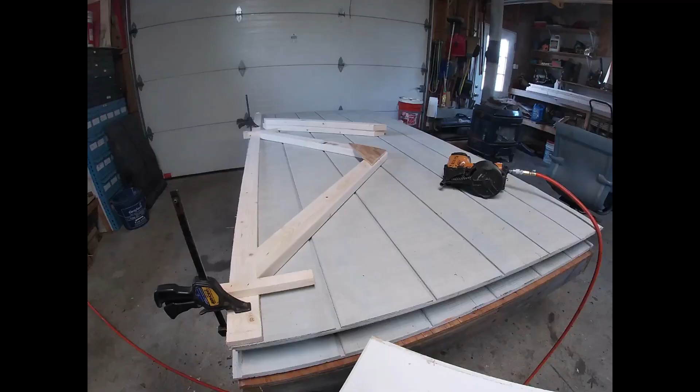I set up this little jig, if you will, just a piece of any kind of lumber. I clamped it here and here, and I measured 54 1/4. As you know, 27 1/8 to 27 1/8 is 54 1/4.

So I got that measured out to that dimension. I stapled a couple of these on, either screw them, whatever. That'll help you set up. You come down and place that flat on here, here, and then you can check out how everything looks. Pick up your gussets. They don't have to be perfect or anything.

Basically this dimension here, they can be wider or narrower to your liking. I'm going to shoot them with a... what I have is 1 3/4 inch nails in this gun.

One truss is done. Now what I did on this one is I made a little jig, nothing more than a 2x3. That's 54 1/4 inches from end to end. And I put the top of this 2x3 right at 6 feet.

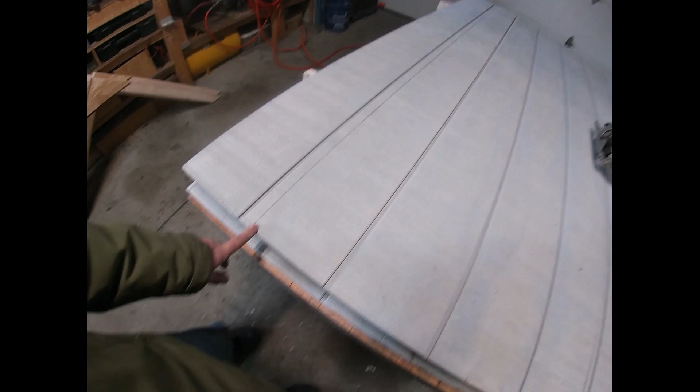I got the gable end peak marked out, and also the doors. I'm going to go with 30-inch doors. Kind of wide for this size shed, but I want whoever gets it, ends up with it, to be able to put a snow blower, and most walk-behind lawnmowers could go through this door.

The height, I'm going all the way up to 6 feet. Right below that, eventually when gable walls are in place, I'll have a top plate going across here to tie that in. So I'm going to go ahead and cut this, and then I can move it out of the way and build the rear gable end wall.

After I downloaded all my clips, I realized that I don't know if I made it very clear, so I'm going to clarify a couple things.

Pretend this sheet, because I had to go get a leftover cut piece of T111 to demonstrate this. Picture this sheet going on down, not cut here. And I don't know if you, in a previous video, saw how I had this little jig I screwed on temporarily just to put it in the position of where my sidewalls would end up and where my soffit would be positioned.

This black, if you can see it, represents the siding of the sidewalls coming up. So obviously this is going to come over and cover up the sidewall, because that sidewall siding expands the width of the shed by that amount on both sides.

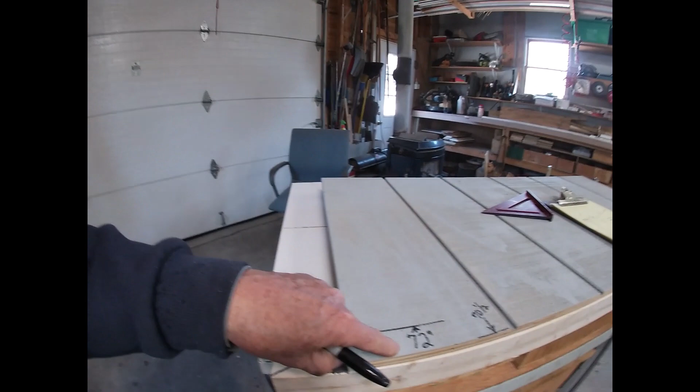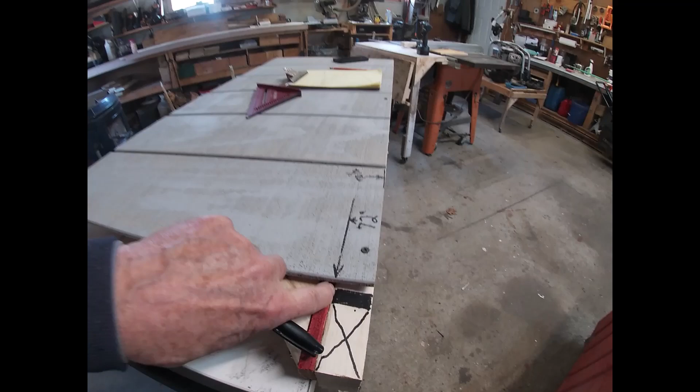I want to mention that this 72 is the height you want, if you're going to do this little jig method to simulate your soffit and whatnot, and your T111 thickness there. Not this plywood, but this little piece, right where the top of this 2x3 ends up, put that at 72 inches, because your sidewalls, the T111, is 72. Also, I don't know if I messed up, but the door height ends up being 70½, because later on you might want to put a top plate across here.

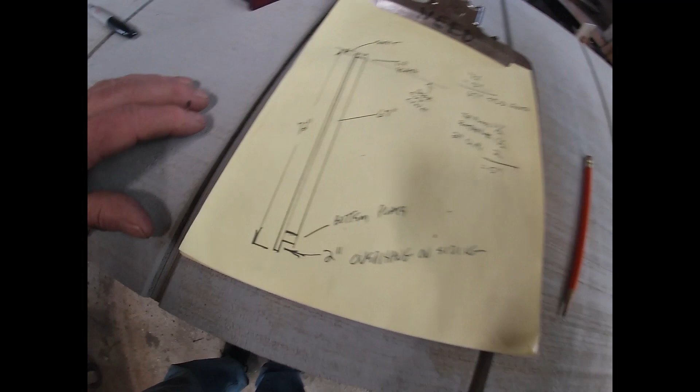Over here, I drew up this little diagram, I hope you can see this. This is your sidewall, looking on the end of it. So in my case, I had 72 inches of T111 I wanted to use.

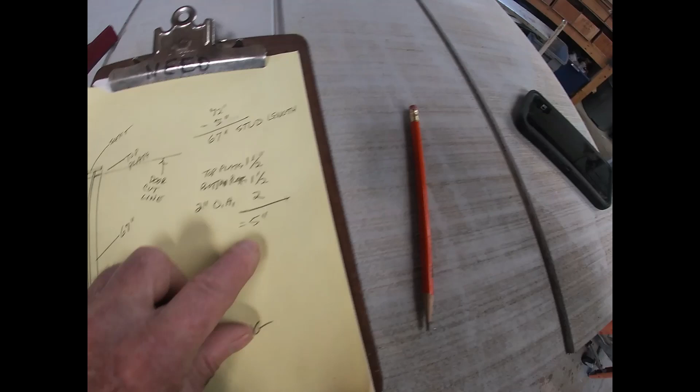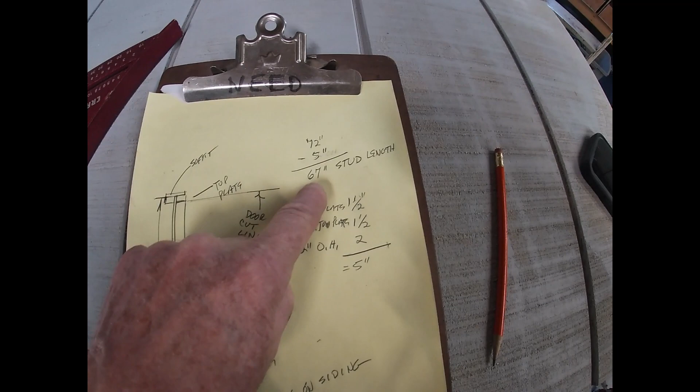With 2 inches of overhang, a bottom plate and a top plate, that adds up to 5 inches. Subtract 5 inches from 72, which is your T111 length, and that'll give you your stud length, 67 inches. So you could cut all your studs 67 inches, frame up your sidewalls, and when you put your T111 on, you'll have your 2-inch overhang.

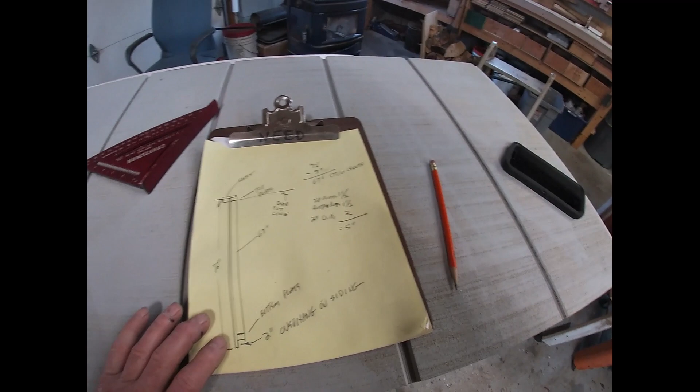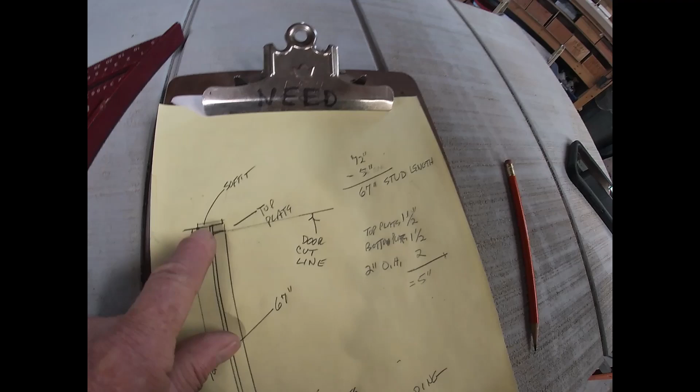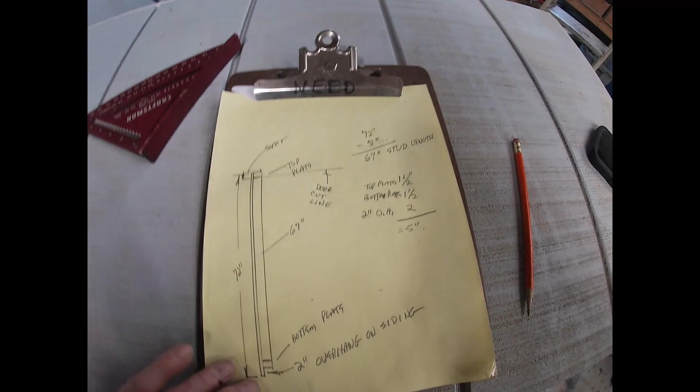I hope that's somewhat clear. Up here you can see how the soffit drops on, and you can see that 72 is right there underneath the plywood or OSB or whatever you put on your soffit. It's pretty much straightforward, common sense, but I'm just giving you this in case you decide you want your sidewalls higher, how you can quickly determine all that.

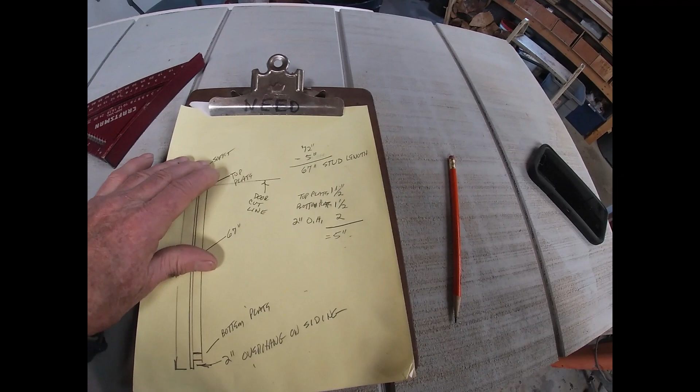A lot of times my sidewalls, I'll build them at a height that will allow me to make the pitch I want and not go above the 8-foot level of the T111. Now on my wider sheds, a lot of times I do go higher. I want to get a higher sidewall here, and to get a halfway decent pitch, I'm up above the 8-foot mark, but I just piece it in.

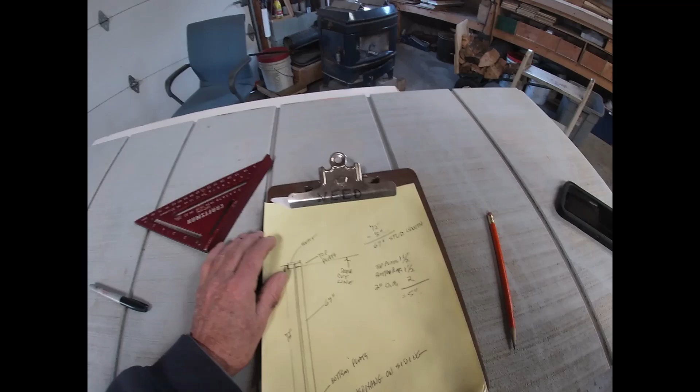I'll try to inject a photo of, I think, a 10 by 12 shed I did. I'll show you how it came out. Well, I got interrupted there, but...

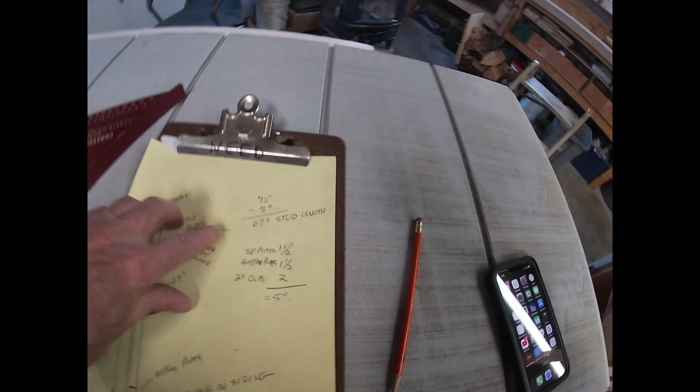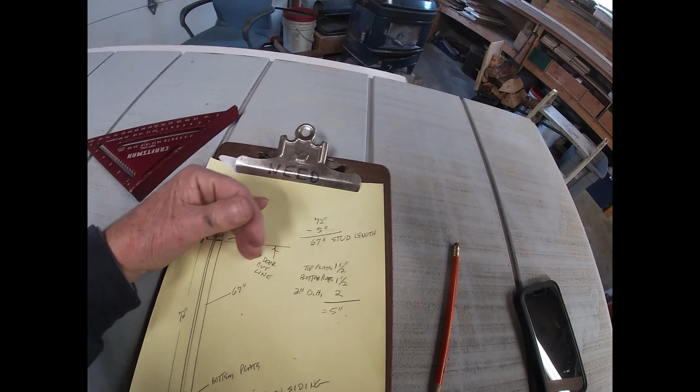As I was saying, on my wider sheds, I'll go higher on my walls. Depending on the pitch, many times I don't want it too flat, so to give it a halfway decent pitch, I'll come above the 8 foot of the T111, and then I'll piece in a piece at the top with Z flashing or drip cap, whichever you want to call it.

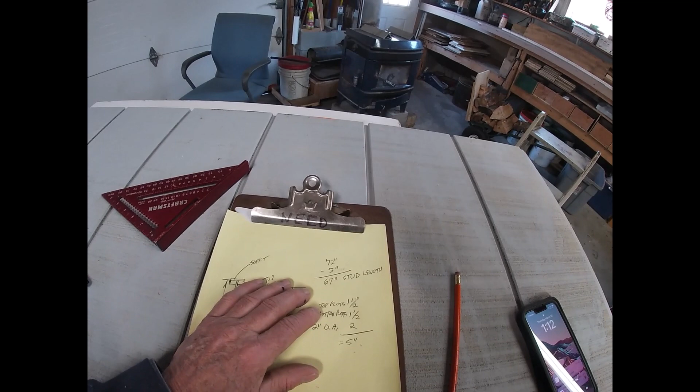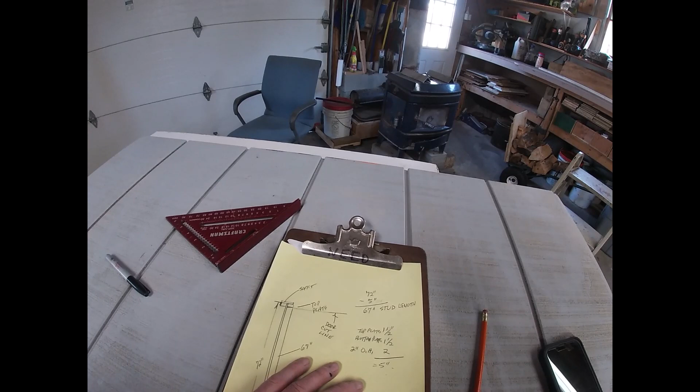I'm going to try to put in a photo of a 10 by 12 shed that I used the same process with for the soffits and everything, and also to determine my length and angles of the soffit, rafters, and the one difference is that on the bigger sheds I do the soffit pretty much all the same.

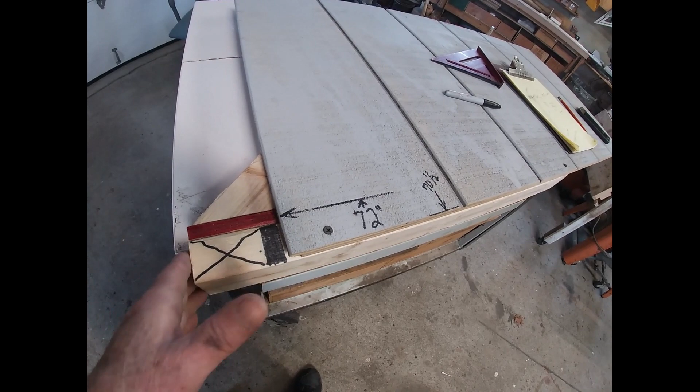Over here, but once my sheathing is on, I'll put a 1x4 piece of pine on here, and that gives it a wider profile for my fascia board coming down, just to look a little better. You wouldn't even have to do that, but you'll see on that shed it's got like a 1x4 pine fascia board. And if you do that, you don't have to change any of this, you just add that on. Your drip cap will cover it.

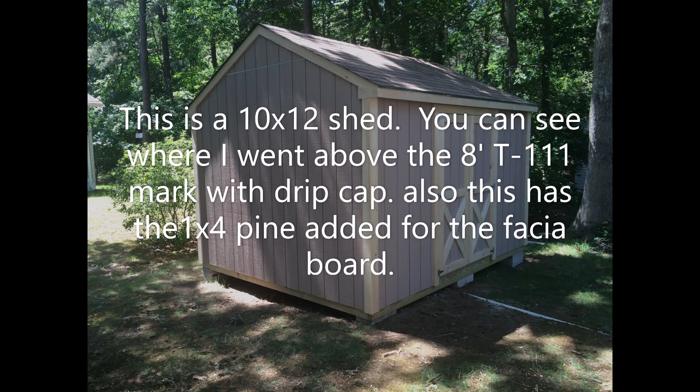I framed up both of the side walls, going 2 foot on center on the studs. These are the soffit assemblies, and I made up both of them. I used 1 3/4 inch nails, kind of zigzagging them down, to attach this OSB to it.

The reason I went with 1 3/4 inch is that 2 inch will just pop through, and you'll have the tips of the nails sticking down below the soffit when you get them on the shed.

I'm going to attach the T111, which I already cut to 6 foot panels. The framing itself measures from top to bottom 70 inches, so when I put the 6 foot siding on, I'll have a 2 inch overhang like I mentioned before.

I went ahead and pre-cut all the panels because I'm limited in space here, but you could put the panels on and cut off the extra 2 foot instead. If you notice here, I got a bunch of 2 foot pieces left over, the remainder of those four sheets.

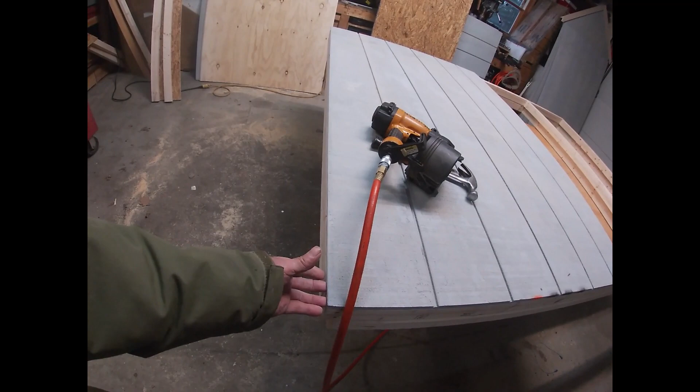So you always want to start out with this side having the groove. I'll call it the groove, I guess, and I'll call this the tongue, just for coming up with some kind of terminology - can't think of anything else at the moment. Now the next sheet will overlap this by half that amount.

Now I'm sliding my other sheet in. You can see that this side here is the side that overlaps, so you drop that right on there. Got your nice little overlap - square it up nice. So it's overlapped perfectly, catch a nail right here.

Don't worry about what's happening down there. Same thing, just push and pull, you get your nice flush. All right, that's really nice right there, about halfway. Then I'll check it down here - nice and flush, now I got a nice straight run.

I don't want to nail anything here because I want to be able to move this if I had to. See, that's pulled out - bring that in, nice and tight. I'll catch a nail right here, and now everything's locked in. I'll put one here if you want, and at that point you pretty much have everything squared up and ready to shoot it off.

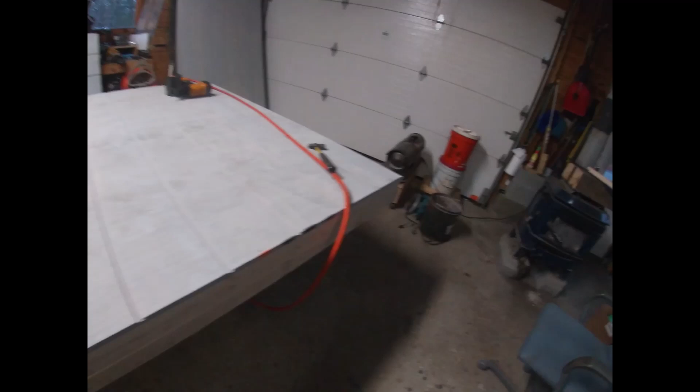But over here, because these sheets are wider than 48, you're going to have to trim off this part of the tongue. Right here, don't know if you can see it, but I got to trim that off - I'll just hit that with my Skilsaw.

And when I put a nail in here before I shoot it up, I'll maybe put one in the middle, but I'll check my stud to make sure it's straight, because if there's any bow you can take it out at this point, and then you're good to go. Second side will be the same way.

If you notice right here, I got my 2-inch overhang. That'll go down over the floor.

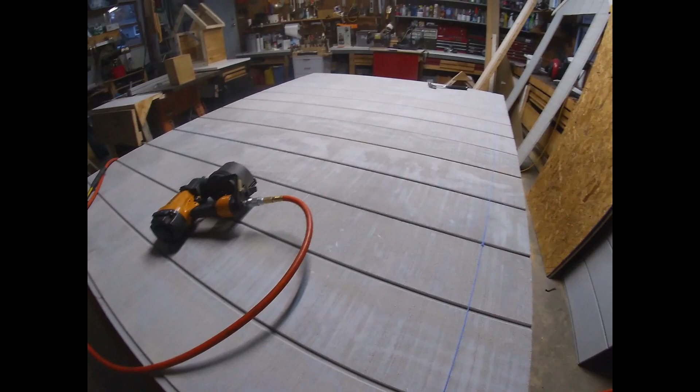I usually snap a line right down here for nailing into the bottom plate. I don't like to just guess, because if any of these nails end up coming out and missing the plate and end up down on this overhang, it'll mess you up when you're trying to scoot it into place, and you're going to have those nails interfere with it. That's about the only place you really need to snap a line.

The top plate, of course, easy. These perimeter studs. And then when you nail this center stud, just remember, this is where this sheet overlaps this sheet. So you want to nail on this side, not this side. Just this side only, and that'll hold this side down.

And when you do, it don't hurt to maybe angle it just a little bit that way. Not a lot, just a slight amount. And don't go too far over or you'll miss the stud. Remember, the stud kind of centers on that, so there's not a lot of stud left over on this edge of the sheet, but you won't have any problem.

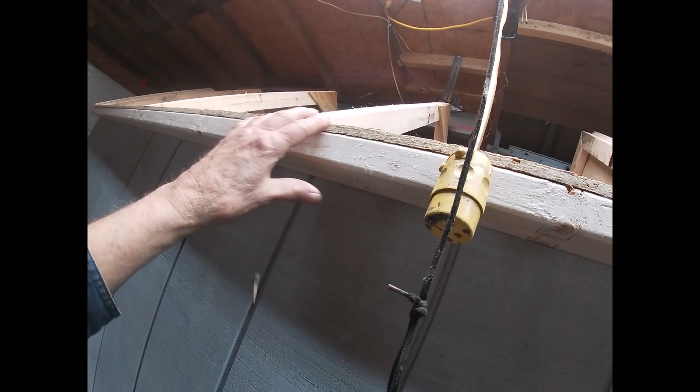Also, when you put your soffit up, make sure it's all the way in, because if you've got any kind of a bow, you can clamp it and bring that in tight before you nail down that soffit. And when you nail it down, you can just nail it down in here, and then you'll be done with that. Also, make sure the soffit assembly is evened up left to right so that you get the proper spacing here.